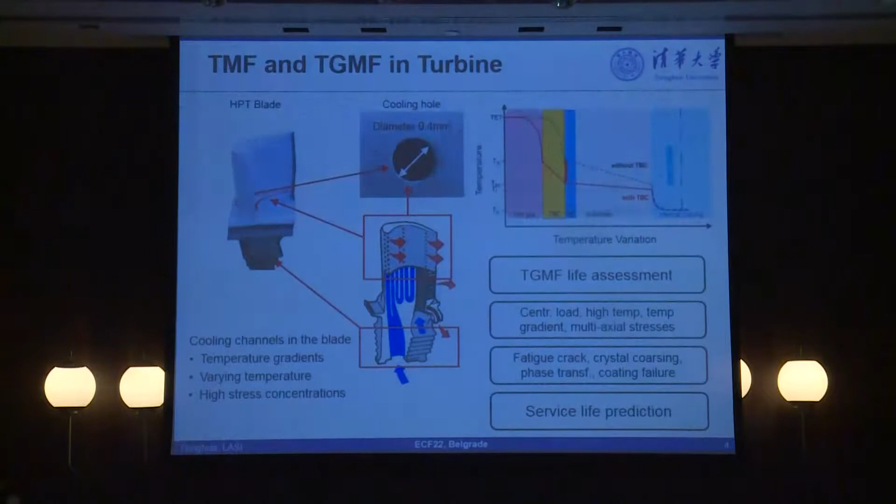Many research works were published in the past years. They found the thermomechanical fatigue property of material can be much worse than the higher temperature isothermal fatigue property. Therefore, it becomes a problem how to quantify the effect of the thermomechanical coupling. Additionally, we have in the case so-called temperature gradient, which introduces thermal stress into the component, and how to quantify the effects becomes also a severe problem. That is the motivation.

Now we come to our test facility. We established a special test facility. That is what you see. This is a conventional machine here. This furnace is heated by radiation. We use lamps focused on the specimen. We can heat up the specimen very quickly, within seconds actually. The maximum temperature we do not measure. Anyway, we can bring material to melt immediately, in seconds.

Therefore we test different materials. In the present talk, I'm going to talk about just conventional nickel-based alloy, and the working temperature for that superalloy is limited up to 650 degrees C. We test also other materials, for instance, the CMC, the ceramic matrix composite, or single crystal superalloy. In that case, temperature is higher.

What you see here is a picture we made. As you see, the specimen here is surrounded by the radiation. The oven temperature is not high, but you focus here, and the specimen temperature becomes very high. You can change the temperature very rapidly.

That is the specimen we manufactured. The external diameter here is 12 millimeters. Thickness of the tubular specimen is 1 millimeter. The reason is that lower than 1 millimeter becomes very sensitive to manufacturing, and in the real blade, the thickness of the material is around 1 millimeter. Much less than 1 millimeter becomes difficult. The length of it is 120. And that is the specimen.

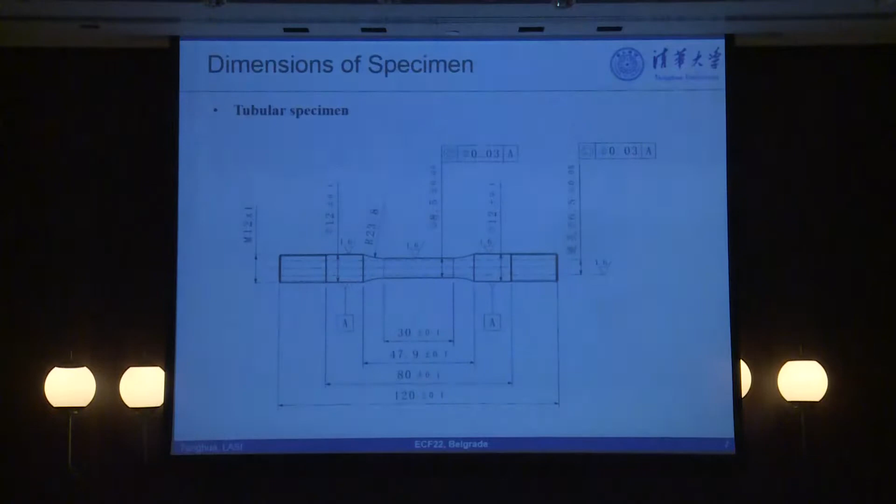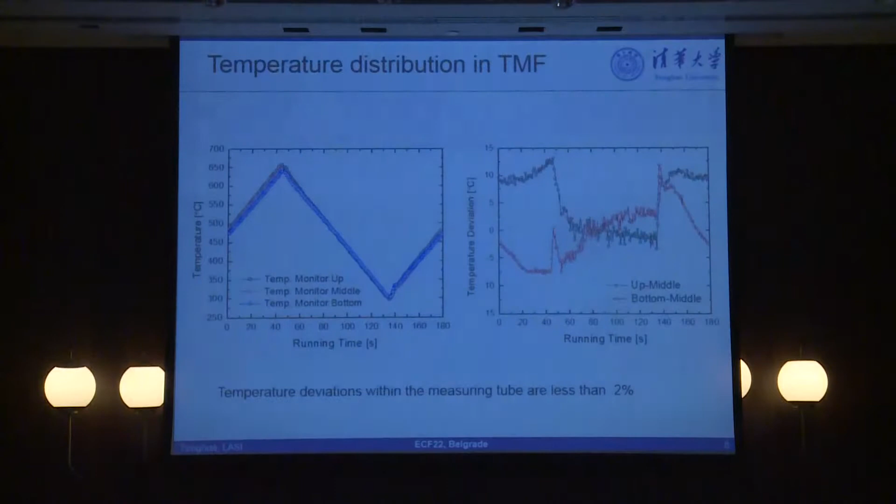And this thermal load will be combined with mechanical load. That means mechanical load is all in the same state actually. We can change the so-called phase angle between mechanical load and temperature load here. And in our specimen, of course, if we're talking about TGMF, we additionally introduce cooling into the tube to introduce the temperature gradient. Then you pump the cooling air into it to introduce the temperature gradient.

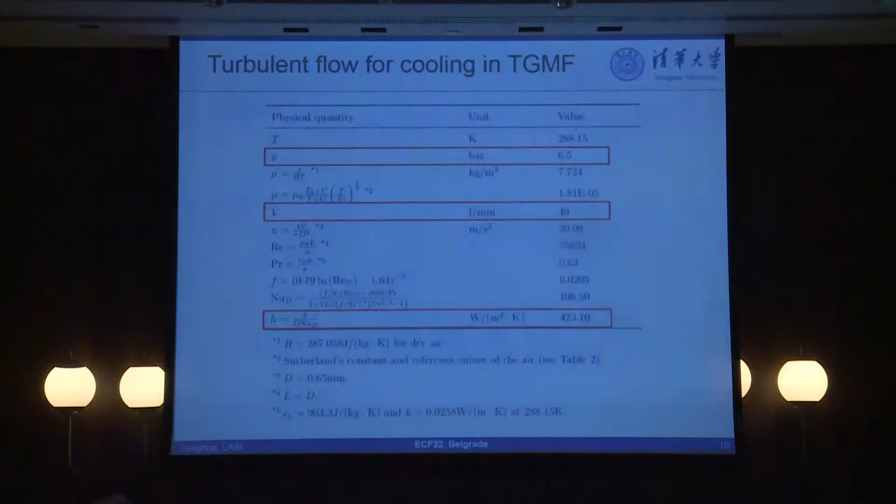But to measure the temperature on the inner surface becomes a very difficult task actually. We tried to measure it, for instance, bringing our thermocouple onto the surface to measure the temperature here. With this specimen, we found the measured value is very sensitive to the pressure on the surface. The thermocouple actually measures the average temperature around it. Therefore, the value obtained is not the real material temperature, but the environmental temperature, so the value becomes nonsense for us.

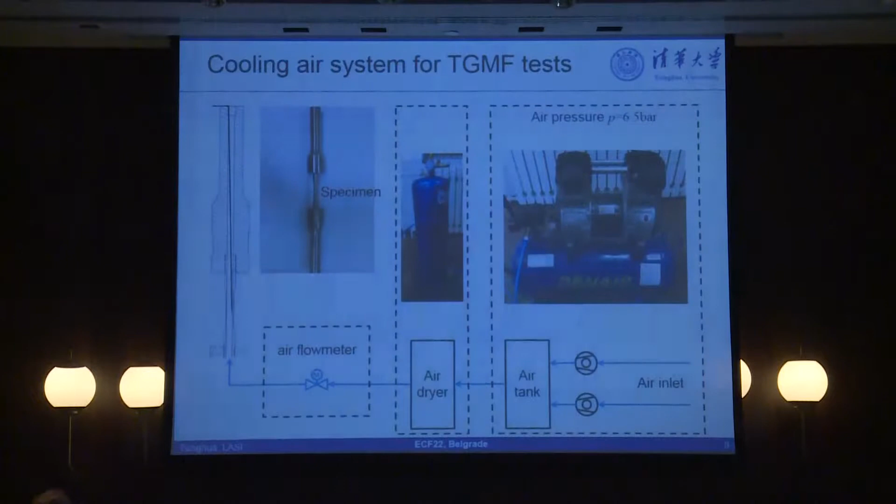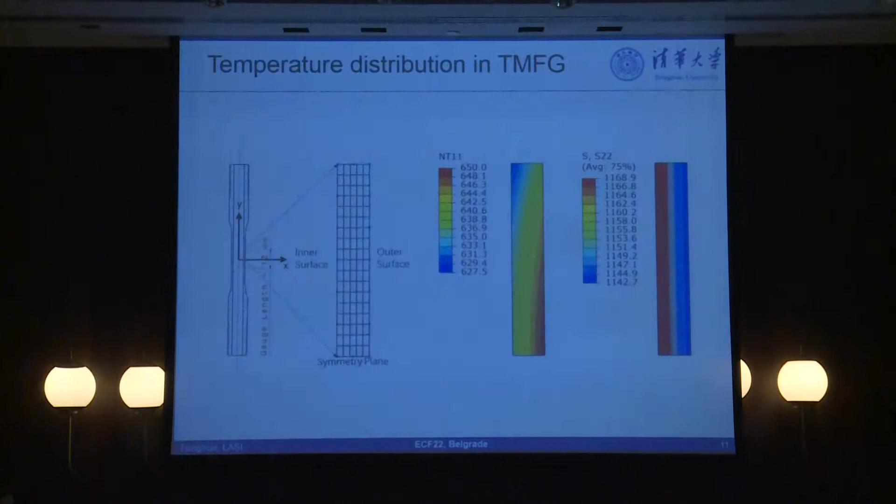And therefore, we go to computations. We established an FEM model and tried to calibrate. Calibration of course happens on the external side and internal side. The external side we can measure exactly, and then change the cooling air and so on, trying to find the correlation between the external and internal temperature. We can calibrate based on stress distribution and so on. That is the test facility we use. So we are going to talk about both thermomechanical fatigue and thermal gradient mechanical fatigue, both cases.

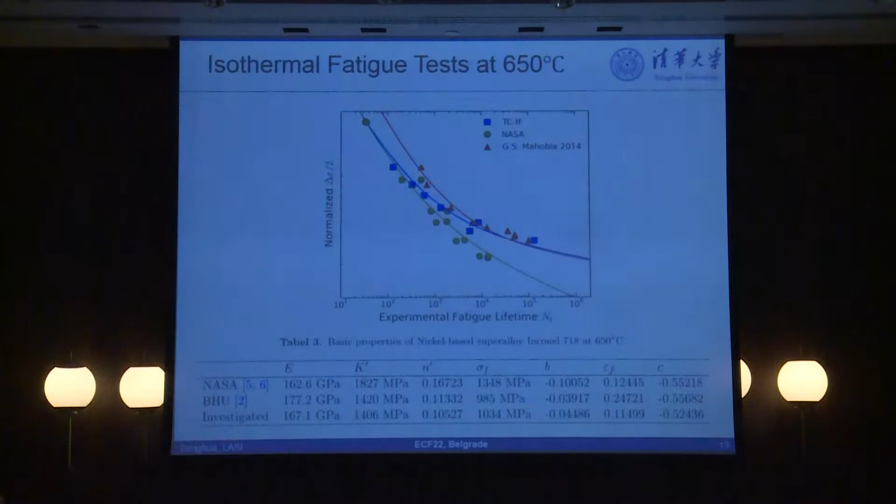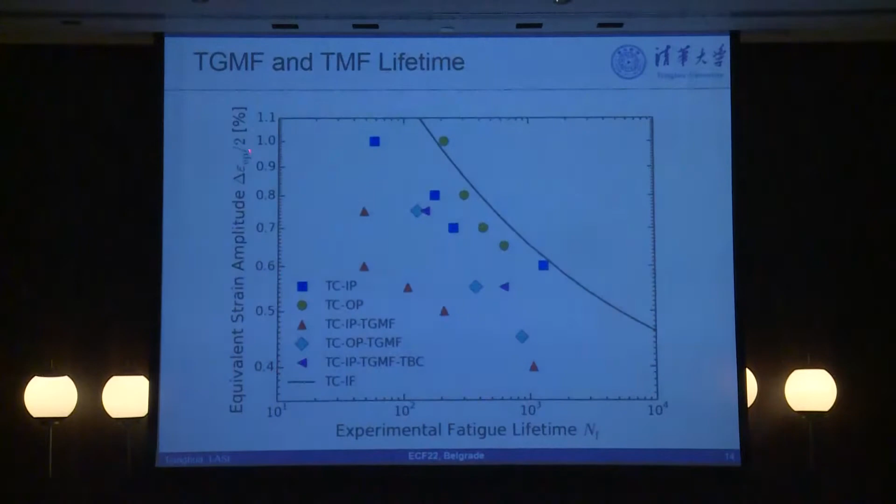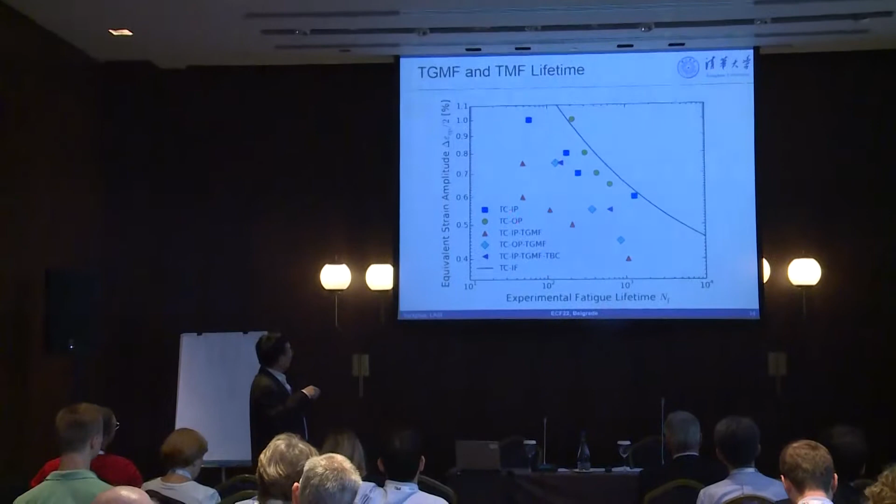What you see here is the mechanical strain-controlled test. The vertical axis is equivalent mechanical strain, and the horizontal axis is life. We performed, as I said, different cases: in phase and out of phase. Out of phase means at maximum temperature you have minimal mechanical load; they are exactly 180 degrees shifted. What you see here is the in-phase case, this line is the isothermal, and that is out of phase.

The red line is the TGMF, in-phase TGMF here. You see the difference between them, almost 2 decades, right? The life cannot be so long, due to the very low speed at which we can perform the TGMF test. That is the TGMF out of phase, and that is with the so-called thermal barrier coating, TBC, introduced on the specimen. Therefore, of course, life becomes better, but the difference to the isothermal is still significant.

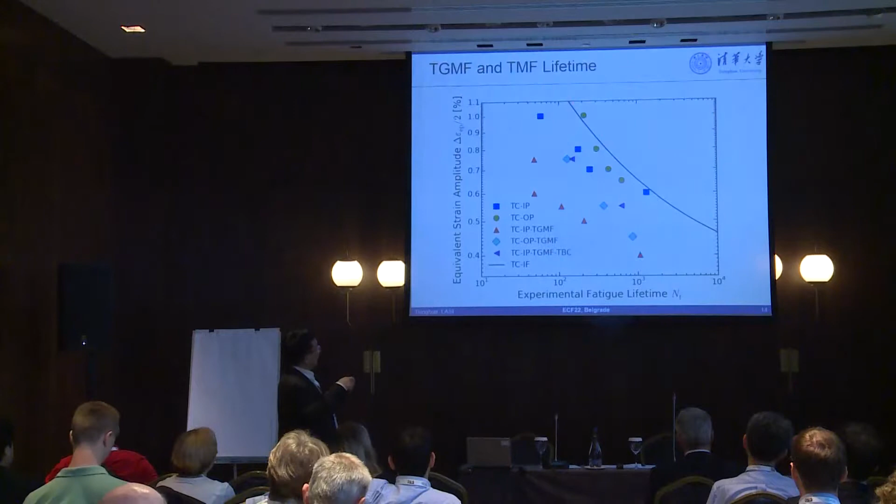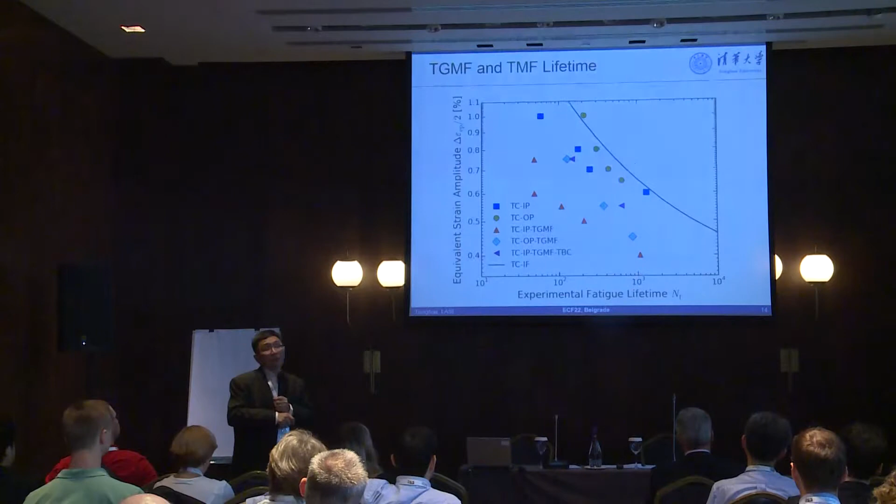The question is how to bring all these experiments together. In reality, we just know the temperature and the mechanical load in design, but life assessment up to now just uses isothermal theory. We use this curve, but these results show that this line is not conservative. It's very dangerous; the difference comes up to 2 decades. Therefore, the design becomes nonsense. So the question is how to quantify the thermomechanical or thermal gradient mechanical effects in your life prediction.

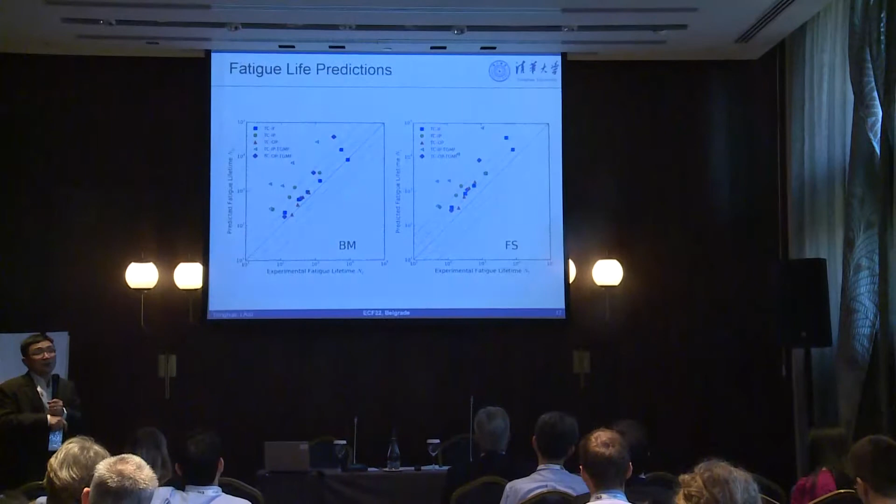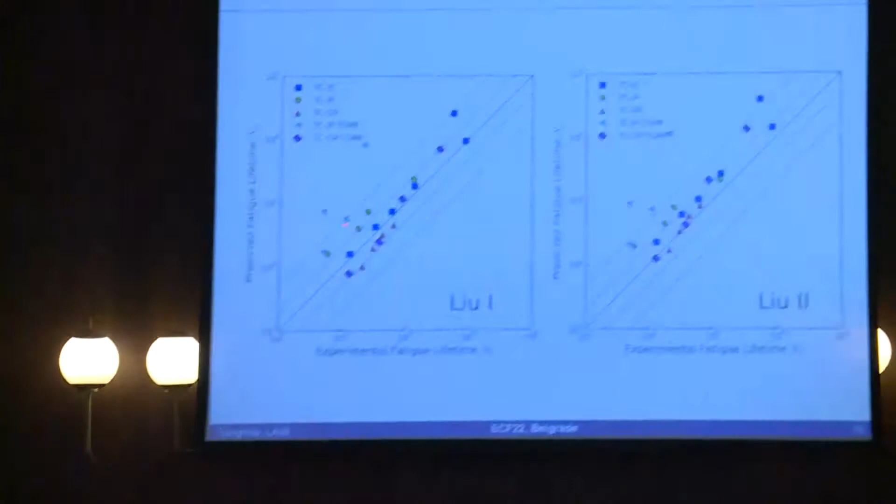Here you see the predictions based on different models, from Brown-Miller and Fatemi-Socie. All results are always in this region, which means predictions based on these models are not conservative at all. You see a similar situation, rather large scattering, and the Liu model parameters present the best approximation. The scattering of Liu model 1 is not so large. That is the double line, that is the 5-times line, and except for up to 2 points, the rest are within the 5-times line region.

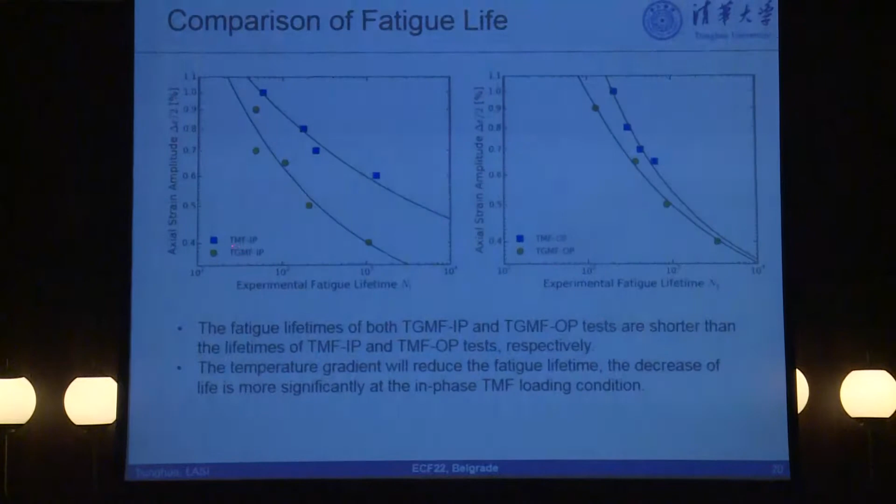Okay, anyway. The effect of the TMF is not describable by the conventional model. What we see here is a TMF and TGMF difference. We can quantify again. That is actually the in phase here. That is the TMF and TGMF. That means we see also a significant effect just due to a 20 degree temperature difference from internal side to

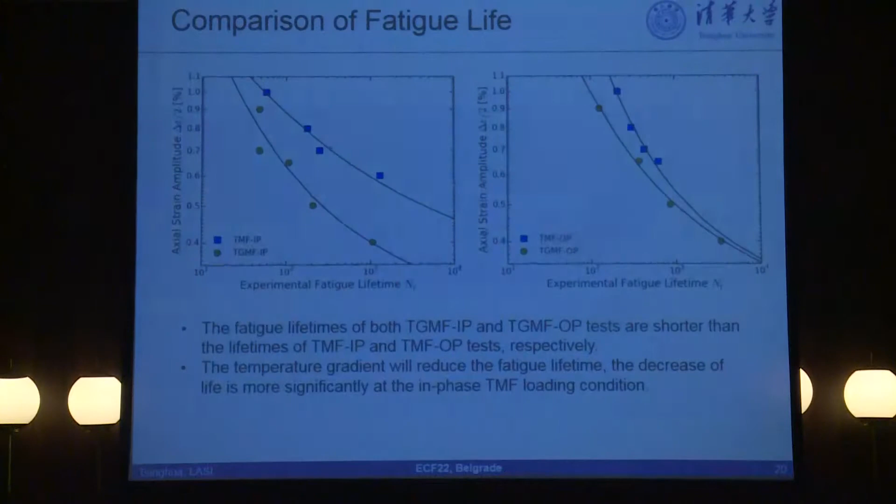external side. In reality, as was said, the temperature difference between external and internal can be up to 100 degrees C. If we increase the temperature up to 1,000 degrees C, in that case the temperature difference is also very significant in phase, but out of phase seems similar again. That means the effect of the temperature gradient is also not uniform. Okay. Good. We come back again.

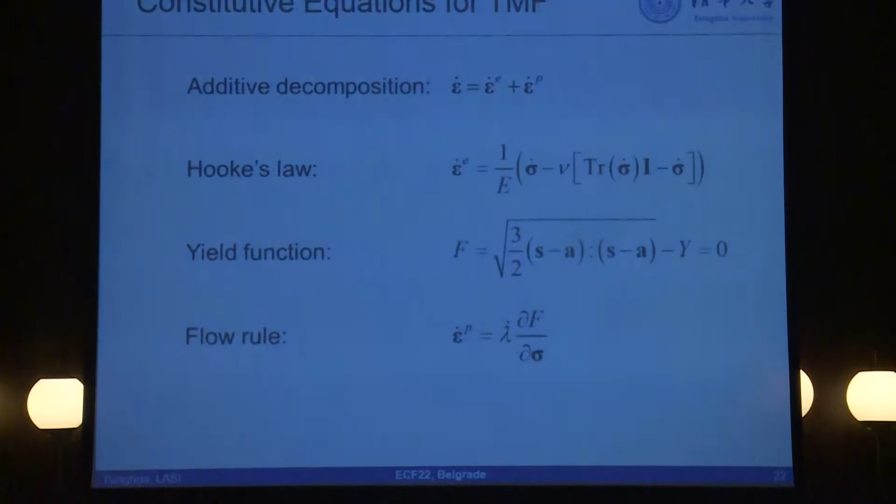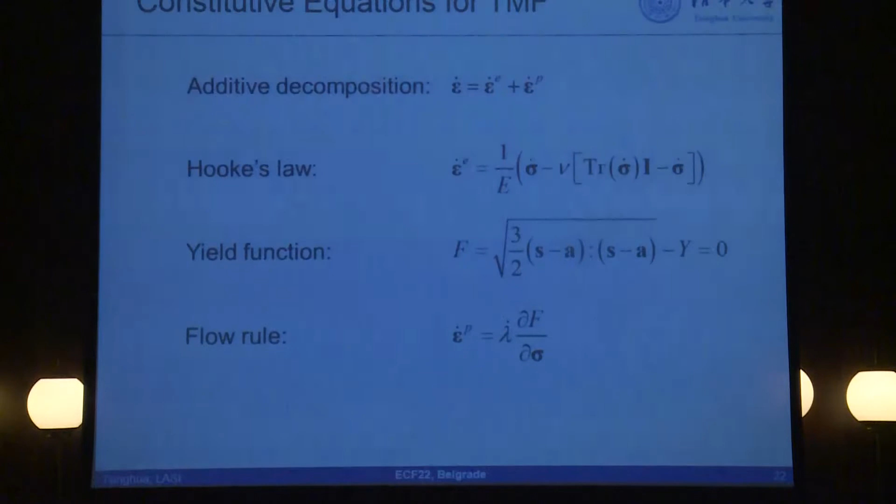That means we actually need a different model to describe it. For the purpose, we need even a new constitutive model for the case. The reason is we have a rather complex loading history. Therefore we developed a special model for TMF or TGMF. That is the situation here. We used the Ohno-Wang formulation, that is the same as suggested, more or less the same, with a modification introduced by Kang here.

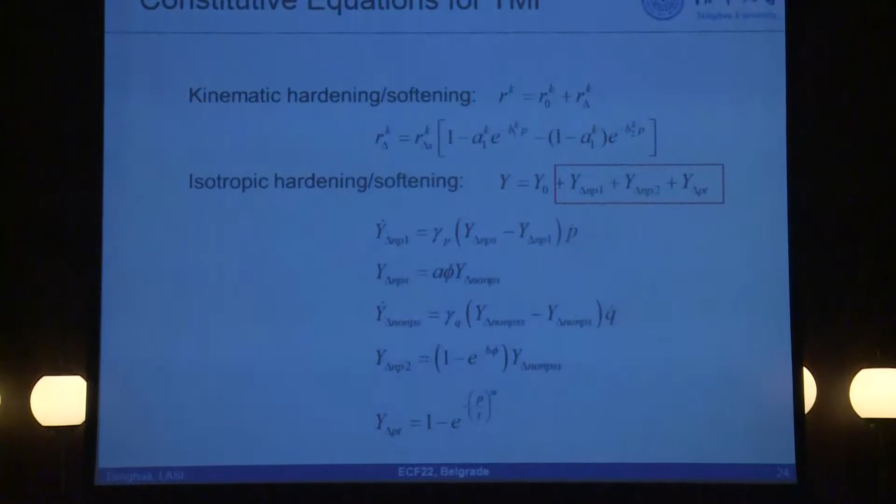And the modification happens actually here. We introduced so-called additional isotropic hardening. The three terms characterize the thermomechanical hardening additionally. This equation is introduced additionally, and the rest remains all the same. And the results show us the comparison. Just one example here. More detailed results are published in a recent paper in the International Journal of Fatigue.

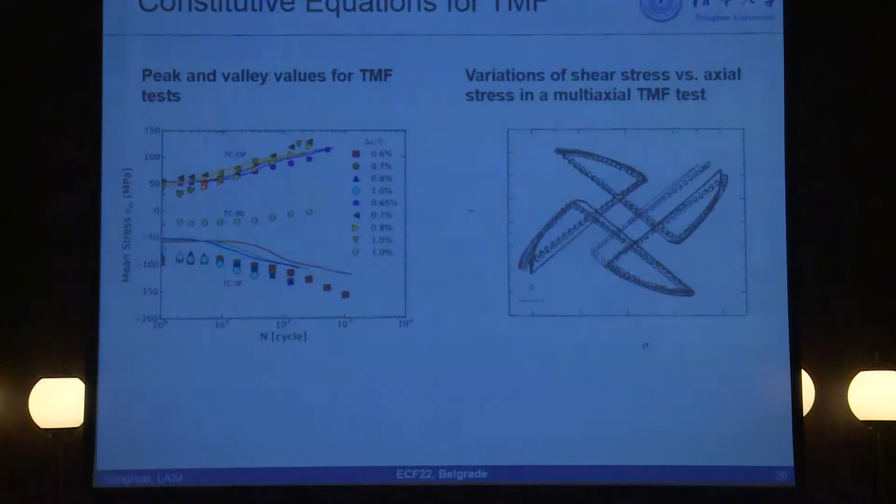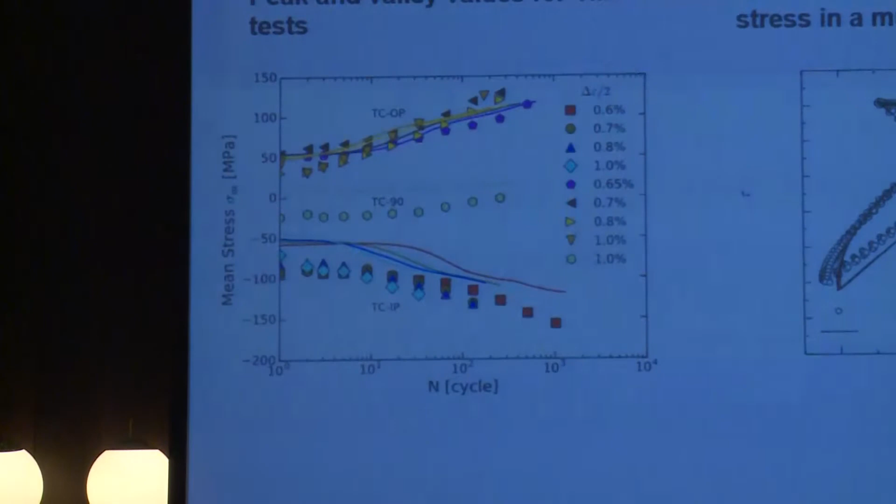And you see the comparison of the peak value between the different tests and results. Symbols show you the test results, curves show you the simulations, and we have very good agreement. Due to the complex situation, of course, you have slight differences. And we consider also very complex loading cases, stress over strain here, shear stress or normal stress. You see that kind of cross form. It's the most complex situation. The model can characterize this kind of problem.

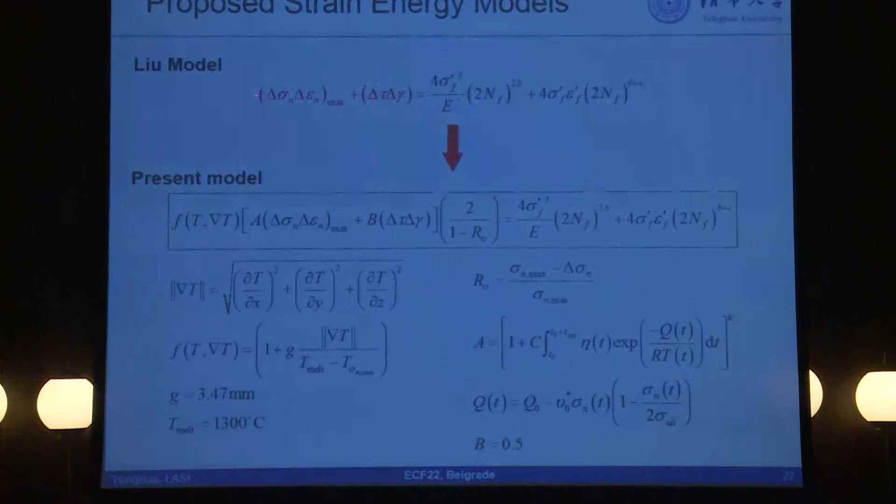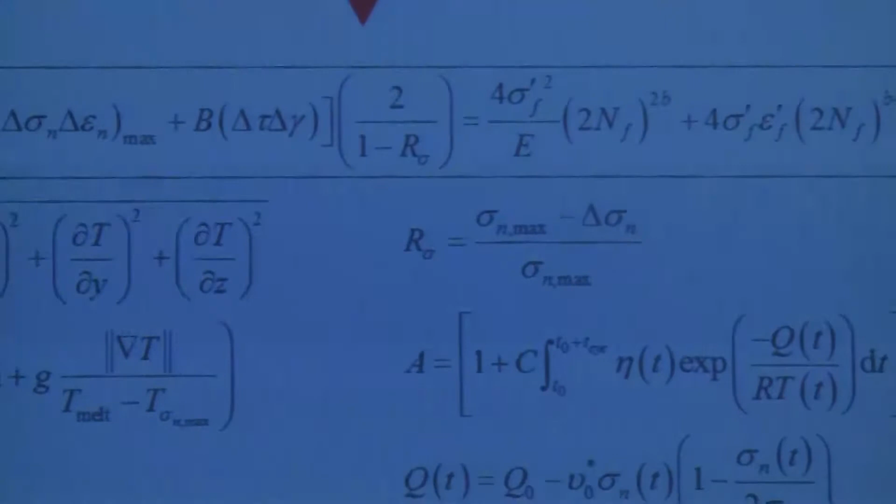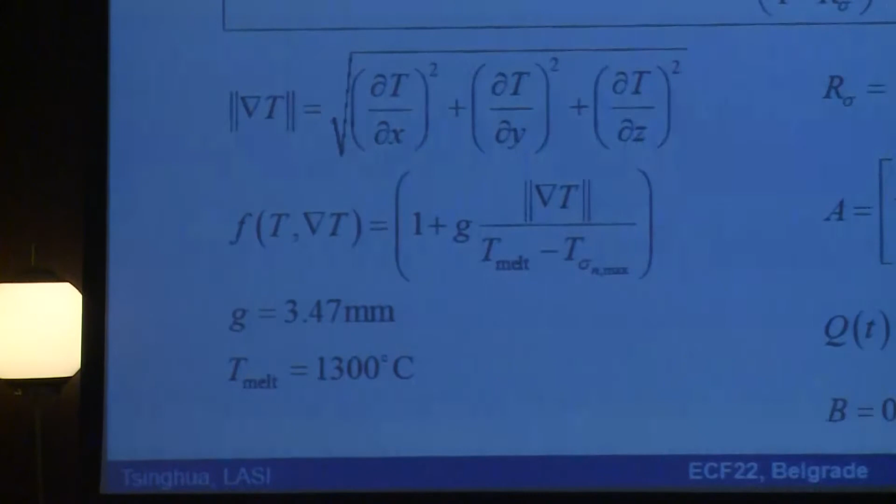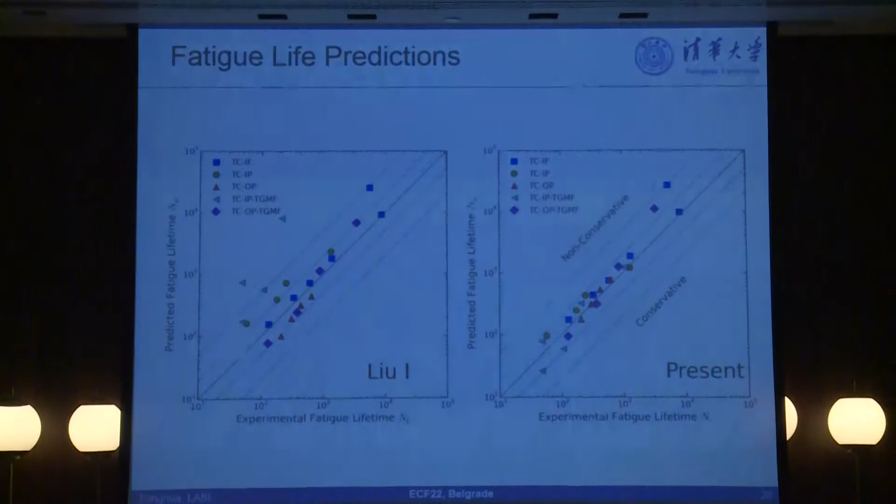temperature gradient. These two terms are related with the thermomechanical case, and we introduce nabla T, the average temperature gradient, and then we consider, more or less from the idea of the Arrhenius, the effect of fatigue-creep, and introduce this term into it. We found these results. These are all new models we introduced. You see the main results are within the double line already.

It is more a comparison between the models. And this is the present model we introduced. One is the best value, neither conservative nor non-conservative. One means exact. You see scattering here again. Our model has minimal scattering here, and so on. These are the results we show you.

Okay, I conclude. Mechanical fatigue with temperature gradients changes material behavior significantly, and the effects of TGMF and TMF have to be considered properly. The fatigue life prediction of TGMF has to include both temperature gradients and phase angles in the model. The non-proportional loading factors based on temperature gradients provide significant improvement in life prediction. The quantification of thermomechanical load effects needs more detailed experiments and combined efforts.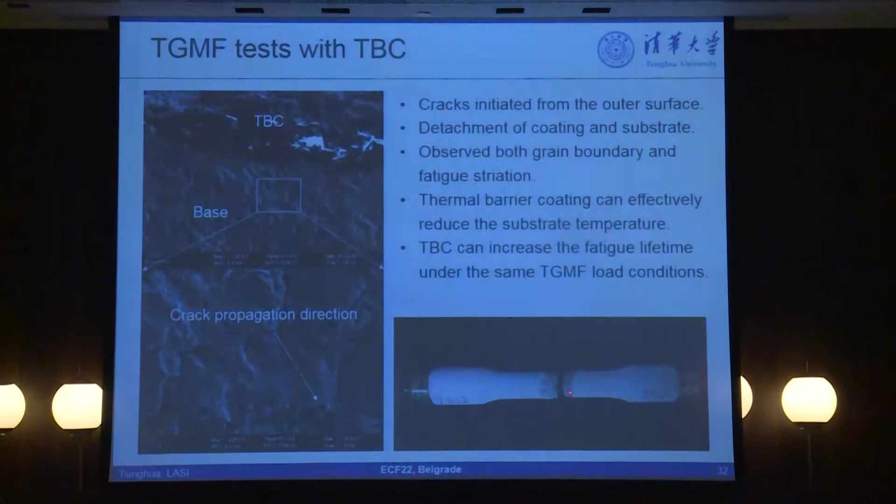The points become significant especially for the single crystal case. As I said, the temperature gradient in single crystals becomes higher. So the last two slides. This is a TBC specimen, a thermal barrier coating specimen, and you test the specimen under different conditions. Usually, if you have TBC, the temperature gradient could be higher. Okay, that's it.